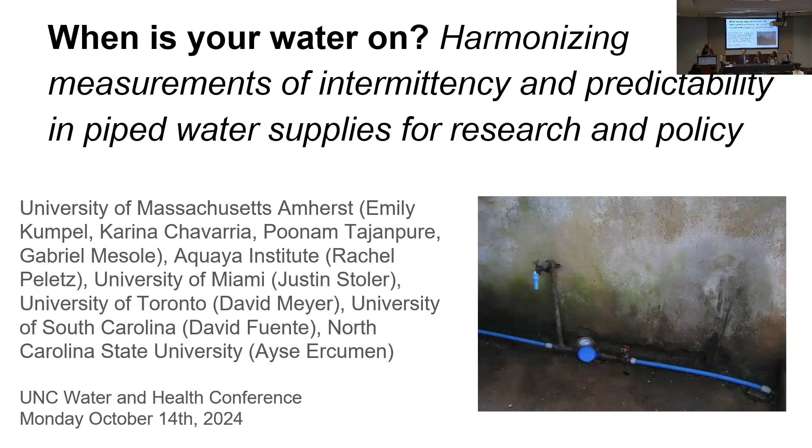So just so you know what we're planning for today, we're going to start with an introduction about intermittent water supply and its complexity. Maybe you're familiar with this and have worked on this. Maybe you're brand new. We want to bring everyone up to the same page of what are we talking about? Why are we talking about this? And then we're going to go through with everyone else here some ideas of metrics, indicators, and questions used to quantify intermittent supply or supply interruptions, and why these are necessary from the perspective of utilities and water suppliers, and then from the perspective of households.

And then we don't want to talk at you the whole time, so we want to do breakout groups. So we're going to form groups. If you are joining us online, we do have a way to do this with online breakout groups as well, and some instructions, and we have Poonam who is managing that, so if you have questions for her along the way, you can do so. So we'll break out, and we have some example survey questions and metrics and indicators that all of us have used before in our studies, and as you'll note, they're all going to be different, and so we want to have you talk about maybe which ones might be good to use, have you used them, and why, and get your feedback on that, and we'll reconvene as a large group.

So we're talking about piped water supply, intermittent water supply. You can also say a rainwater system is an intermittent supply. It rains periodically and you store it. But what we're focusing on for this session is piped water supply that is intermittent. So access to piped water is increasing all around the world. Governments are investing in piped networks. But the presence of a pipe doesn't necessarily inform the quality, quantity, or the frequency of delivery.

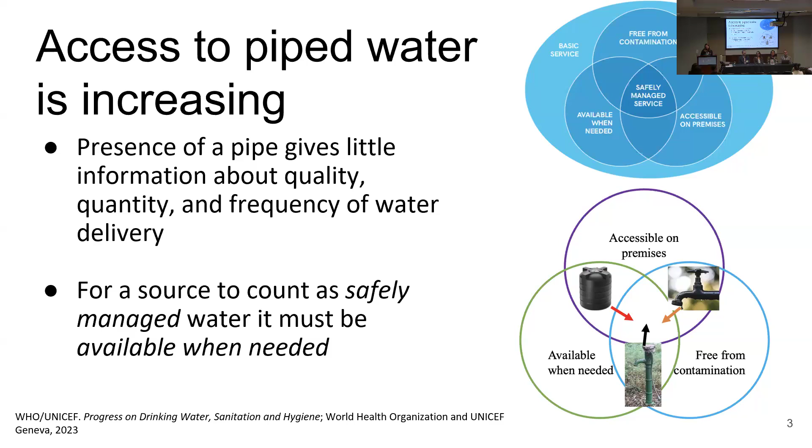So intermittent water supply: the International Water Association defines IWS systems as piped water supply service that's available to consumers less than 24 hours per day. That's the official definition. What does that mean? How often? Is that every day? Is that sometimes? That's what we want to talk about today.

But there's many other words for this, and you might have heard some of these words in different places. Sometimes this is called rationing. You might hear about a water rationing schedule. You might hear about water shortages, unreliable supply, discontinuity, interruptions, supply-driven supply. All of these are words that are used in many different places in order to talk about a very similar concept, which is when pipes do not provide water 24 hours a day, 7 days a week.

You can often know that there's intermittent supply when you look around and you see roof tanks everywhere. That's usually a good sign, not always, but often a good sign that there's an intermittent supply. Or if you see valve operators in the street turning on and off valves. If you visited different cities, you might not have noticed there was an intermittent supply because maybe where you were staying had a roof tank, and so it felt like a continuous supply. But these are some of the signs that might show that.

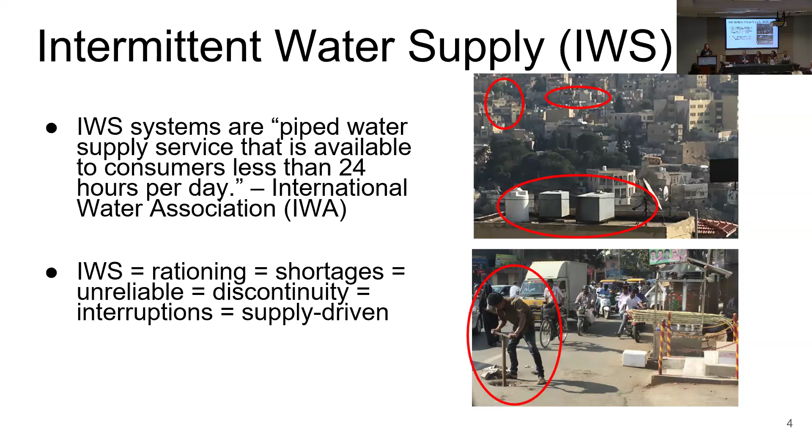Getting good data on this is really hard. Again, this is why we're talking about this. The estimates that have been done have estimated that at least 1 billion people in the world have intermittent water supply. This is a huge percentage of the world's population, right? It's 1 billion.

So an intermittent supply can take many different forms. You can kind of have this spectrum of what might be called mostly continuous to mostly intermittent. And then you can have some that might be predictable and some that might be unpredictable. So there might be a water supply where water is provided to the whole network for 2 hours every day.

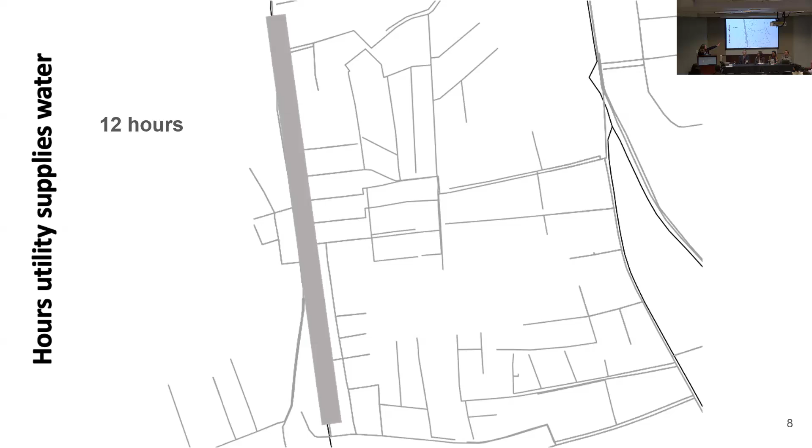So you can have a city or town where maybe everyone gets water for a few hours a day, it turns on and off for, say, an entire small village. That would be one example. But often when you start to get bigger, you get rotational delivery. And this gets super complicated. You have all of these different areas where maybe you need to turn on a main line from a hydraulic standpoint. This main line needs to go on for 12 hours, let's say. So if you happen to be along that line, you get 12 hours of supply.

But then if you are on some of the feeder lines off of that, then you might just get 5 hours of supply, because that 12 hours has to stay on, because it's going to supply the next areas. So you might have 5 hours of supply for this area, but then later you turn on the smaller feeder line from that, because water flows through pipes, right? So you might only turn that one on for 3 hours at a time.

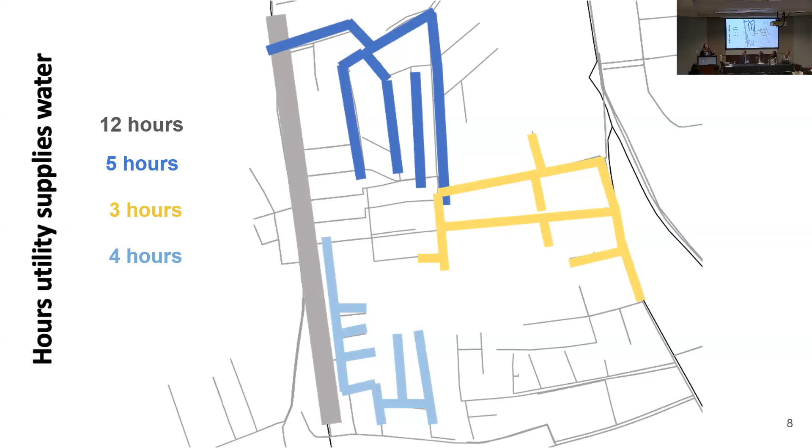So you can have people in a small area that are experiencing very different number of hours of supply just because of the hydraulics of how water has to run through pipes. And then that 12-hour supply, maybe the other ones turn off, and then another one turns on for 4 hours. It's really complicated. And then you can also say, all right, that's what the utility supplies. They're like, yes, we supplied 5 hours of supply here, but what do households actually experience?

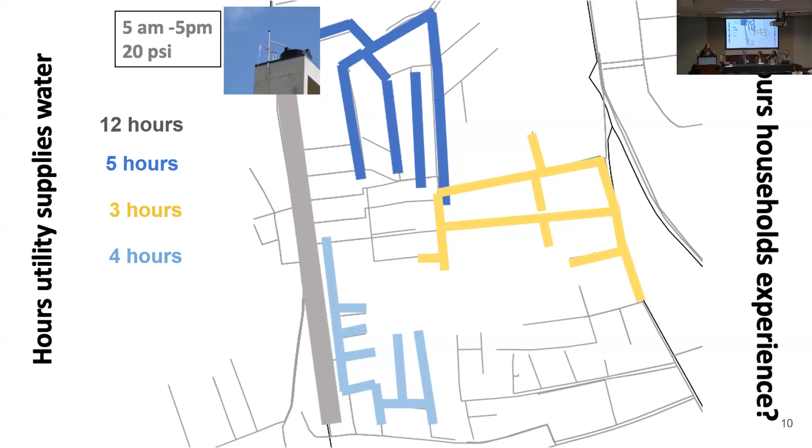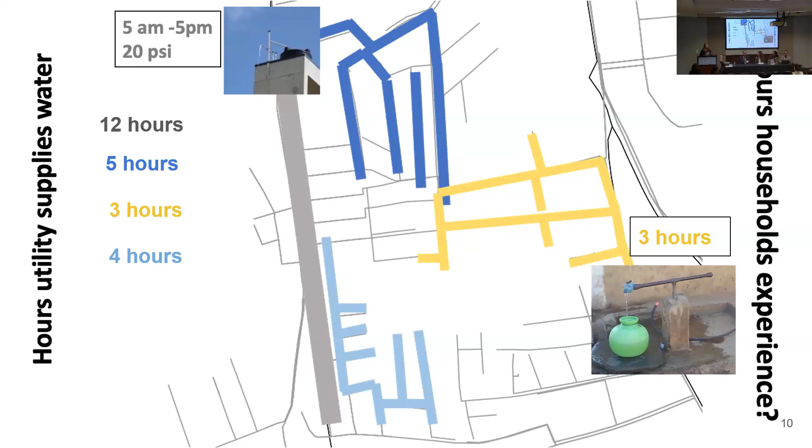So this household that might be at the beginning of the network might get their 12 hours of supply at 20 PSI pressure. It can go right up to their roof tank. That's pretty good, right? But if you're at the end of the network, all the other people are using the water ahead of you, the pressure is going to drop by the time the water supply gets to the end. So maybe you only have 5 PSI of pressure and you're only getting 3 hours, right? And so you can have a whole lot of variability within the same network just because of the hydraulics and how this rotation actually works.

And then to further complicate things, households can basically simulate a continuous supply. They can make an intermittent supply a continuous supply with their coping infrastructure. They have storage infrastructure, public and private water sources, trucked water, other things that kind of mediate this. So especially the higher income households are going to be able to simulate a continuous water supply through extensive storage and alternative sources, even if the water is intermittent.

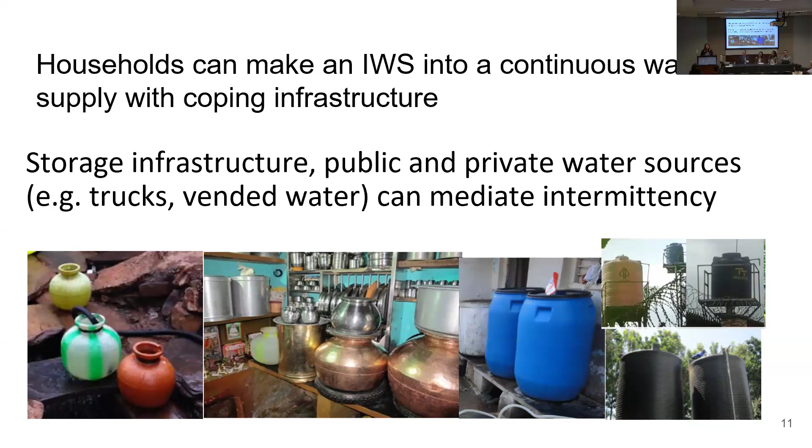So we've been, and by we, many of the people that are here, and particularly I'll call out Justin Stoler for this, we've been talking about what are definitions around this, because we use words like intermittency and interruption and disruption and continuity. Everyone in the sector, in policy and practice and research, we're using these words differently. And so we've started to try to come up with some definitions of these things.

Where intermittency or discontinuity from a service provider perspective might be a lack of continuous availability in the system, but for households or the water users, it might be answered differently if the household has planned for this, right? If a household has a huge storage tank and the water gets delivered once a day and they've stored this water, they might not experience that intermittency, even though the supply is intermittent. So you can have the same definition that's experienced differently, whether it's a utility or a household.

An interruption, what is it? When does intermittency become interruption? That's a really good question. We don't know. That's something we need to talk about. But interruption is maybe water that's not available in the system or infrastructure as expected. We can also think about the Joint Monitoring Programme definition of available when needed, but that might also, again, depend on household wealth and infrastructure.

We can talk about unpredictability, right? We mapped out this predictable or unpredictable supply. So do we know about the supply in advance? Does a service provider have a predictable schedule where they provide this many hours here, this many there? And then do users actually know when that's going to happen and how often? And then reliability, so a likelihood that a water system will fail or not fail, and what does failure mean? Provide water as expected, whether that be availability, continuity over a time span.

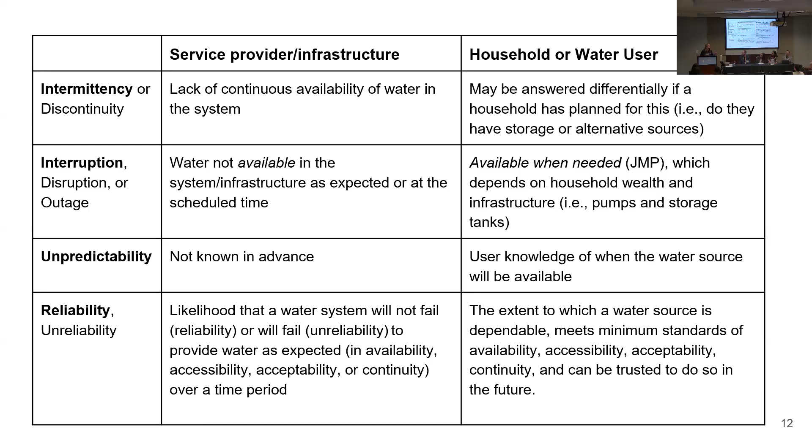So next I'm going to hand it over to some colleagues to talk about some of the indicators that are currently used in the sector, or that we have all used, and some of why we might want that. So we're going to first do utilities and 2 examples of utilities, and then we'll move on to households.

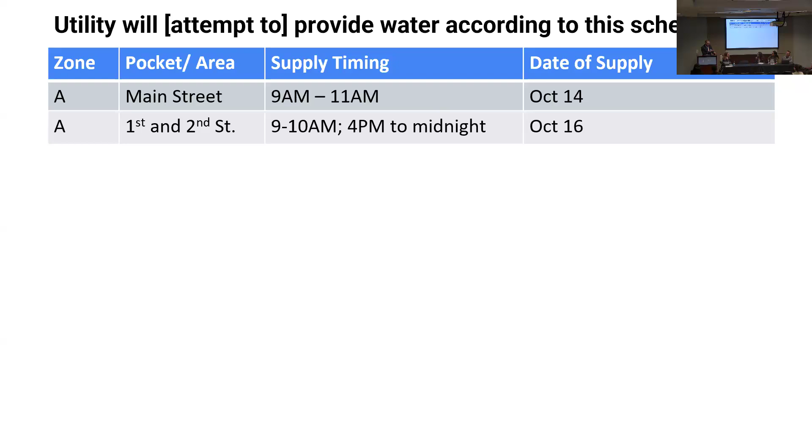This is harder to process because you have to stitch it together based on the column that is least reliable and has the most typos, the street name column. You can imagine all sorts of different schedules. So here are pictures of what actual schedules look like, cropped so you can see them, but you have lots of things, 5:30 a.m. to 7:30 a.m. on every third day. Does that mean 2 days of gap or 3 days of gap? I'm not sure. You can also imagine morning timings and evening timings.

So from 3:30 a.m. to 8 a.m. on Tuesdays and Saturday, daily, Monday, Wednesday, Friday, and daily, right? This is 5 rows taken from a schedule with more than 2,000 rows. And we got Tuesday, Saturday, daily, Monday, Wednesday, Friday, daily, daily, right next to each other. So they are quite complicated, but these are the least complicated forms of utility schedules because they're static. Right? They have days of the week with hours that are reasonable.

But you can also find rows in these schedules that say things like, quote, the availability of water is 19 to 20 hours per day, divided in each pocket for 60 to 90 minutes every 2 days. And then they have a list of 27 different pockets, and so it's a rotational supply. So, like Emily described, the whole system gets 19 hours of supply, but one at a time your neighborhoods roll down the street with your valve operator on his motorcycle or his bicycle, turning them on and off.

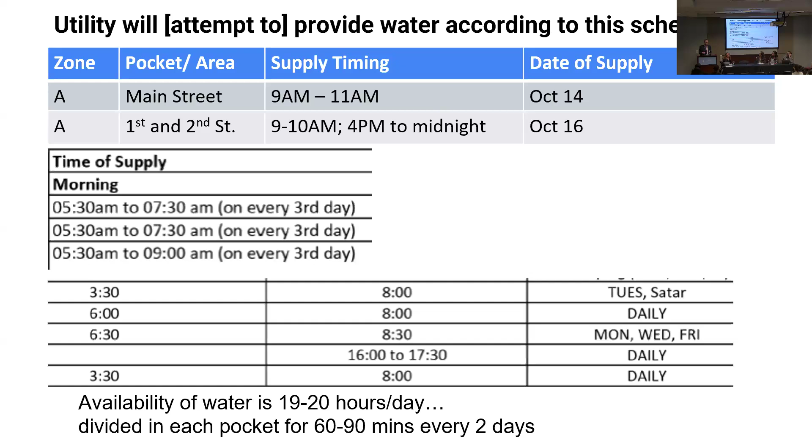So towards metrics, I'll talk you through the easiest metrics. Supply duration. Hours the water is turned on when it is turned on. So from 3 p.m. to 6:30 p.m. is a duration of 3.5 hours. This one is really easy to understand, but sometimes people say duration when they mean supply continuity. So hold that in mind.

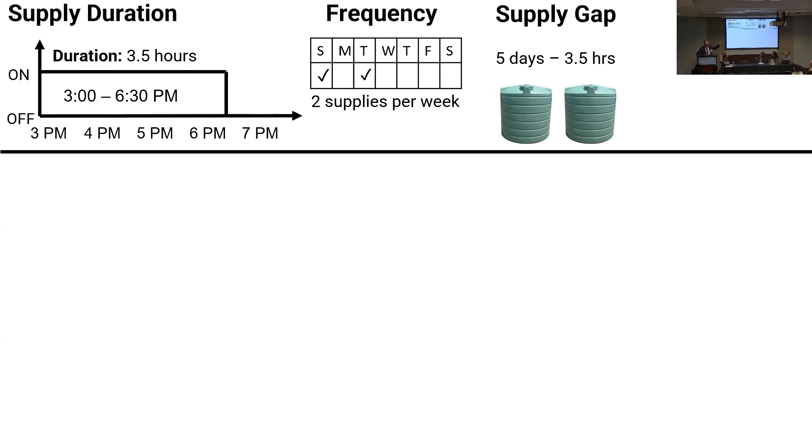We can have frequency, so you could imagine a supply on Sundays and Tuesdays. I care a lot about supply frequency because it tells you about the supply gap, which tells you how much storage people need. So 2 days a week tells you something about the supply, but knowing the days of the week tells you that actually Sunday and Tuesday is a terrible spacing. You could do Sunday and Wednesday and need 1 day less storage.

Right, so we care about frequency or timing because of the supply gap, and we multiply frequency and duration to get the average amount of water you get, and that's supply continuity. The average hours per day of supply. So sometimes you'll read a paper and it'll say this is a city that runs with a supply duration of 1 hour. Incorrect units. Is that 1 hour when it's turned on once a month, or is that an average of 1 hour per day? Really hard, really important.

So similarly, frequency matters because you can have the same duration, but once a week means a different supply gap, so you now need more storage, and half the continuity, right? You get an average of how much water you can fill in 30 minutes of whatever pressure you have.

And again, at once a week, you could have a longer duration. A 7-hour duration once a week gives you a similar supply gap, but the continuity of your first system. So you now get back to this 1 hour per day on average, which gives you more water you could take out, provided you have the storage. So these, I think, are the 3 biggest and most important metrics that I have been working with when I think about water utility schedules.

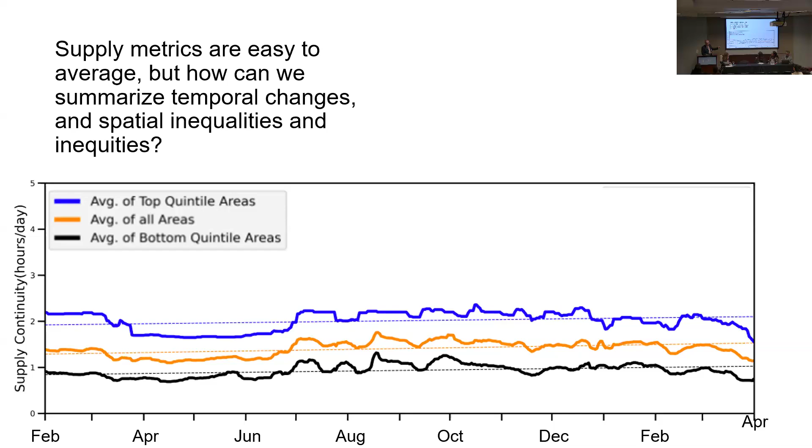And they're relatively straightforward if a utility runs with a constant schedule that is uniform across the city. But these are averages. They average time and space. And that becomes much trickier to figure out what you want to do with if you want to assess how things are changing over time. So here's a plot of 16 months of data, supply continuity, hours per day on average, as we go through some seasonal changes, both on average and in the best quintile and the worst quintile in a city. You can imagine doing a spatial analysis of a different city where you think about wealth by neighborhood and days of storage required by neighborhood.

And you could look at an inequity plot where in this particular city, the poorest households who have the least money to buy storage, the least structural integrity to support kilograms or tons of water on their roof, require the most storage. So that is not just a city that is unequal, it is a city that is inequitable. So I think a lot about these 3 metrics and how they vary spatially, temporally, and I especially think we need to be thinking about dispersion so that we can think about equality.

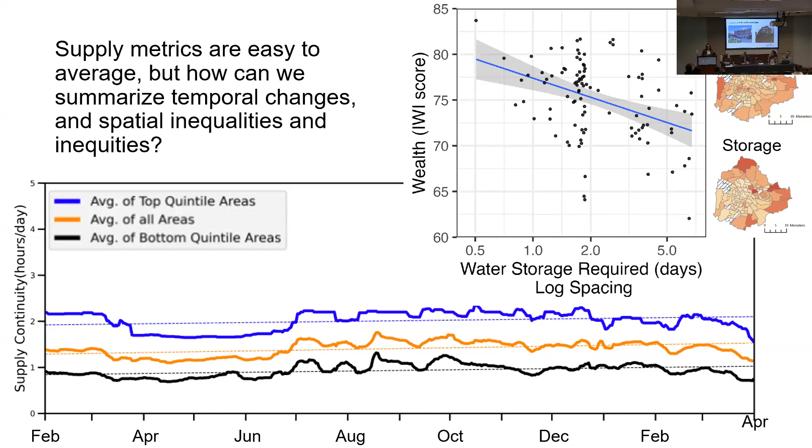I started asking our colleagues about this over the last few weeks, and it touches almost every research project that we have going on. And this is by no means an inclusive list of everything that we're doing, but just a subset. We're doing a lot of work on water quality testing at Aquaya. Guess what? You need to know when the water is running so that you can know when to do the testing. So we are looking at what are the most cost-effective water quality monitoring models. Where do you test water?

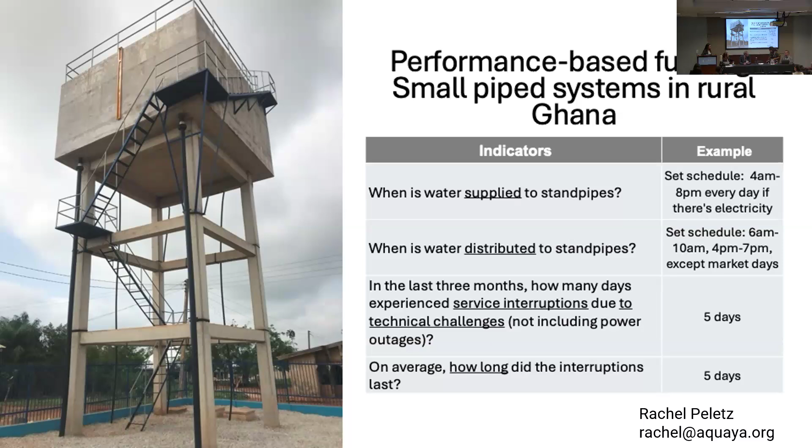I'm an associate professor in the Global Wash Cluster at North Carolina State University, and I'm going to take us over into the household space of intermittent water supply. And that's everything that I just said. And specifically, I'm going to talk about an impact evaluation that Emily and I conducted a little while ago in India, specifically focused on intermittent water supply. I'm going to be using the words IWS for that throughout the presentation.

So when we embarked on this, I'd say a little over 10 years ago, there was no major Indian city that had a continuous water supply, and I've checked, and that still appears to be the case. Correct me if I'm wrong, but it still appears that no major city actually gets their water in the way Indians like to call it, 24/7, 24 hours a day, 7 days a week. There are, however, efforts to put that in place in multiple cities throughout India and elsewhere globally.

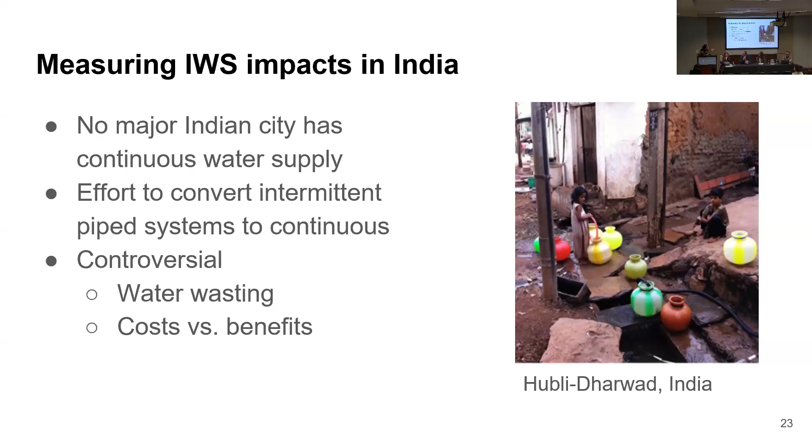And at the time when we embarked on it, this was a controversial undertaking. There was a lot of debate around people being used to a certain way of storing their water. When the new water comes, they dump what they got. If they now all of a sudden have continuous water, are they going to waste a lot of water, right? There was just a lot of talk on the street about what this might do. And there was an inkling about what it might cost to upgrade a whole city from an intermittent to continuous system. There just was not a whole lot of quantified data on what the benefits may be, or how large the benefits are, and is that going to justify the cost? So that's kind of what motivated us to do our impact evaluation.

And we were lucky to be able to piggyback on a demonstration pilot project that was really trying out this continuous supply idea in the twin cities of Hubli Dharwad in the state of Karnataka in India. And luckily for us, before they committed to doing this everywhere, they said, let's just try and convert 10% of the connections in the city to continuous water supply.

The remaining 90% stay on their intermittent supply, business as usual, and then we're just going to see where the cards fall. So that, as a scientist, gave us a perfect platform for being able to do an impact evaluation. I'm an epidemiologist, right? If I was going to design a study to study this, I'd say, well, some of you folks just get upgraded to continuous, some of you stay in intermittent, we're going to go ahead and compare. Very hard to do on a scale like this, but we're fortunate to be able to leverage an ongoing

natural experiment. So we ran a matched cohort study, which in epi language just means we're looking for folks who had remained on their intermittent supply, who looked as similar as possible to the demo guys who'd gotten continuous supply. They were identical in every other characteristic, except that externally the water supply frequency had been altered in one of the groups. And we were curious about understanding impacts on water quality. This was at the time quite groundbreaking. I don't think it had quite been done. How is this going to impact infectious disease, coping costs, or really across the board?

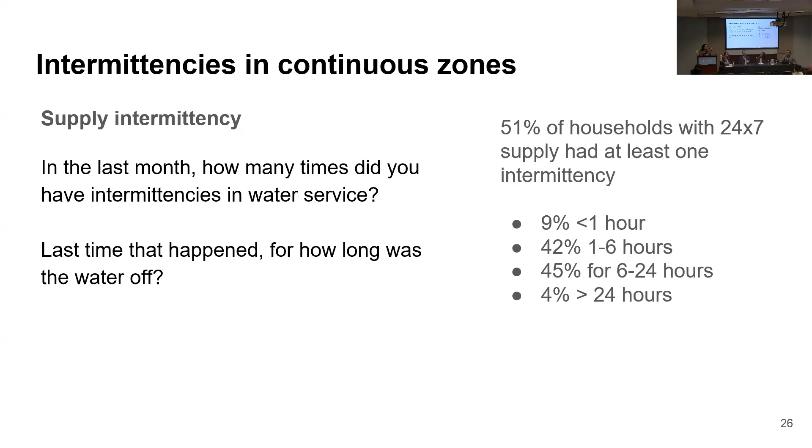And we found that actually half of the folks who lived in quote-unquote continuous zones had lost water service at least once during our study period. In some cases it was a short intermittency, less than an hour, but some of them were up to 24 hours, more than 24 hours, etc. So there are shades of continuous within the folks who are getting continuous supply. And you might also imagine, if you live in a continuous zone but things sometimes still shut off, it made a lot of sense that people would continue to store.

So we did find that almost 80% of folks who were getting continuous water supply still continued to rely on storage containers for their immediate needs. If you asked them, can you give me a glass of water? They did not go to the tap, even though presumably the tap would have flowed. People went to a container that looked like this about 3/4 of the time, and they had been on this continuous scheme for several years at that point too.

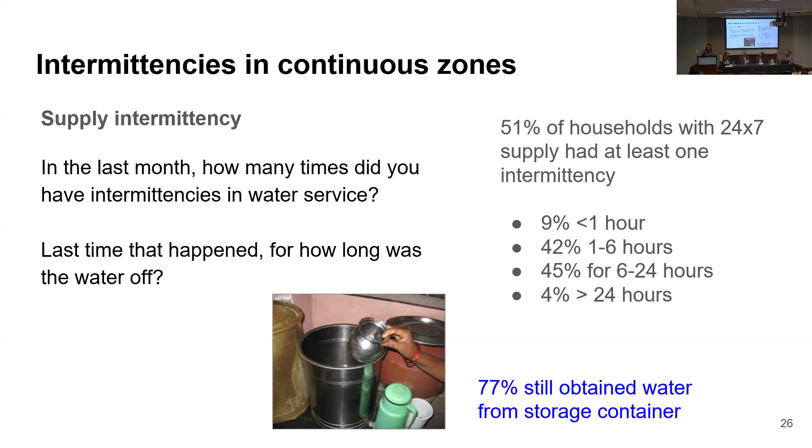We also had an inkling that not all intermittent systems are created equal, so we also wanted to just dig in a little bit: how intermittent is intermittent? That's before we had heard from David about these three important metrics like duration, frequency, continuity, but I do think we stumbled upon fairly similar metrics back in the day. And again, we were like, well, recall is going to be really hard.

If we ask how often does your water come, if it changes, well, this time it came every three days, but maybe six months ago it was a drought and it was different. So we got to hone in on the latest experience. Today is Monday. On what day did your water last come? Then we figured since we're going to go back to the households multiple times, we're just going to capture the inherent variability that way.

And that generated sort of a nice matrix of garble, just lots of names of the day and days of the week being mentioned that Emily somehow then made sense out of, and that we could convert to a supply frequency. And then we asked, when do you expect it to come again? And last time it came, how long was it on? So we're just kind of getting at these ideas of supply frequency and duration.

But we also had an inkling that this might not always be predictable, so we did put in some predictability questions as well. Does it always come at the same hour? If not, how many hours do you usually wait for the water to come? In the last month, how many times did the water not come on the day you expected? And how many days later did the water finally come?

I gave a sneak preview of the yes and no binary demo zones, but if you want to learn more about these metrics and what they spell in terms of health outcomes and coping costs, we do have a presentation upcoming tomorrow by Poonam Tajanpure, and she's going to talk specifically about predictability, because we're learning from conversations with our colleagues. Justin Stoler has been leading a lot of work on this. This predictability aspect is not negligible. If you have some way of knowing that the water is going to be off, there's things you can do. So that's my little plug.

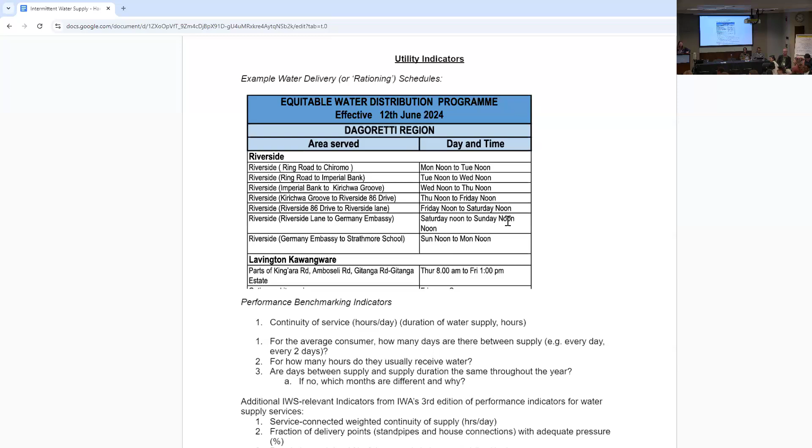And how when there is an intermittent water supply, people might switch sources and then they're being exposed to other risks associated with that. That then ties into the second point that we had, which is how can risk, like the idea of microbial risk, also be interpreted with intermittent water supply? And so trying to think of how to expand upon these questions to better get at what risks people might have, what health risks are associated with this too.

And the last thing we talked about is just the role that sensors might play. I think we talked a lot about varying experiences with sensors, both good and bad, and what level of data granularity that you get as part of that might not be captured in a cross-sectional survey. Great, thank you. All right, our Tuesday morning group.

Hello, we took quite a few notes. So for our household section, we thought it was important to discuss the location in the system, like if that's closer to the head or closer to the tail, because, as we were talking about, that'll affect the pressure and how much water delivery you're getting. We also discussed caste and the power dynamics. So maybe some people could tap more, they could have multiple taps in their house that might not be accounted for, versus people who are lower in the system might not have as many taps or as many sources.

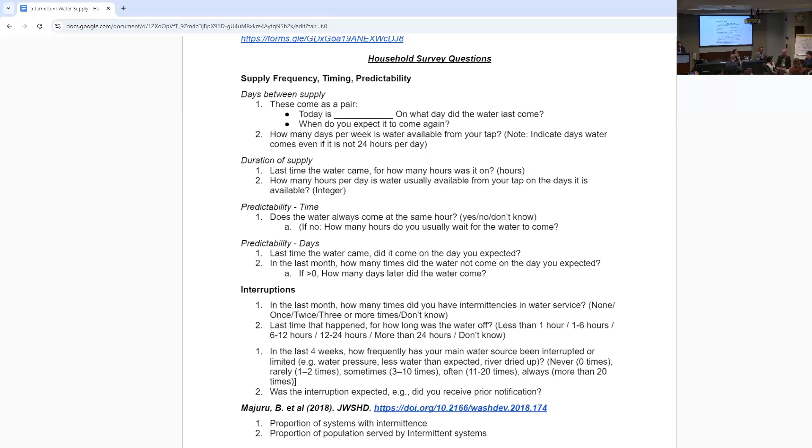Great, thank you. All right, and our last group over here. Yeah, I think we had a lot of really good discussions about the questions. We noticed that they mainly focused on things like frequency, timing, and predictability, but not necessarily making a distinction between drinking water and water for other uses, or much of an attempt to collect data on how people are using water that comes from their tap.

So we talked about how in different settings there might be really complex professionalized systems for drinking water, like getting it in tanker trucks or sachets or something else that's perfectly acceptable, and that's what they use for drinking water, but they might rely on piped water for things like bathing or cooking. And in that instance, maybe interruptions, or satisfaction with that, would be best measured not in terms of days without service, but the timing of when they are receiving service. So if it's before or after work, when they would most likely do those activities, as opposed to receiving water between like 12 and 2 p.m. when people aren't bathing or cooking.

So we talked a lot about showcasing those nuances through survey questions, and talking to households in terms of their satisfaction with their service. We'll talk a lot about the quality of coping mechanisms, right? Or like what I just said, if you have an intermittent system. So I manage a project in the West Bank, Dan manages a project in Haiti, two really different environments where your availability of alternative sources that are safe, reliable, affordable, predictable, are incredibly different, and that influences how customers interact with utilities, and accordingly how utilities will respond, and the stakes are just much higher.

So like I said, you could have an intermittent system where it's just more convenient to receive water at a certain time, but not necessarily life or death, whereas in other cases it's a much higher stake situation. So just reflecting that in our surveys. And then the last thing about utilities is noticing that it's also about continuity of service, but it might be useful to put indicators for the HR element of that. It's a pretty radical change to go from intermittent to continuous service, and whether they have the capabilities, the technical ability, the financing, or the hardware to sustain a continuous system, and if they're prepared to make that shift and what help they would need with that.